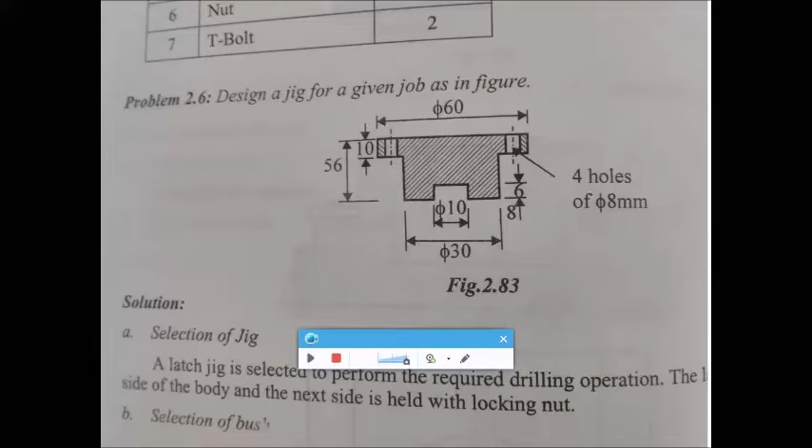So design a jig for a given job as shown in the figure. We will make a note of these dimensions. It has a length of 60 mm, and we are going to make 4 holes of 8 mm dia. So we need 4 drill bushes.

As usual, we'll start with a rough sketch. We can go for a latch jig. We'll go for a simple rough sketch in order to get an idea of what are all the elements of the jig body, and what we'll be using to design a jig in order to make 4 holes on this component. So this is the rough sketch. Go for a rough sketch, you'll be getting an idea.

So you'll be using jig buttons. You may also require a jig feet, and we know about a latch jig. So when you unlock this part, it is going to open and we will be able to remove the component. So these are the 3 jig buttons which are used, and you can see the drill bushes. This is you can call this as a front view. On the isometric view, and on the top view, we will be able to see 4 holes. So top view is not given here.

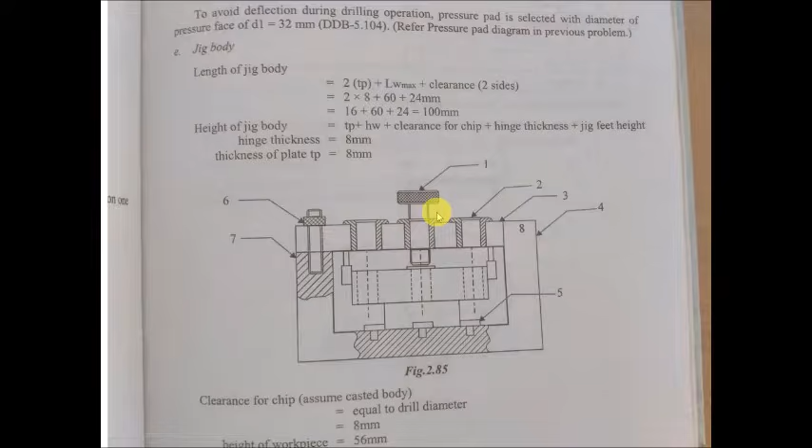I think this is enough, so we'll start with a rough bill of material. We need a clamping screw, 4 drill bushes, and then the jig body, jig button, and you have pin B and pin A. These are the locating pins, and you have a locking screw.

So after drawing the rough sketch and after designing each and every component, you have to draw a neat sketch of the entire workpiece along with the jig body plus its various components, and you also have to tabulate the bill of materials.

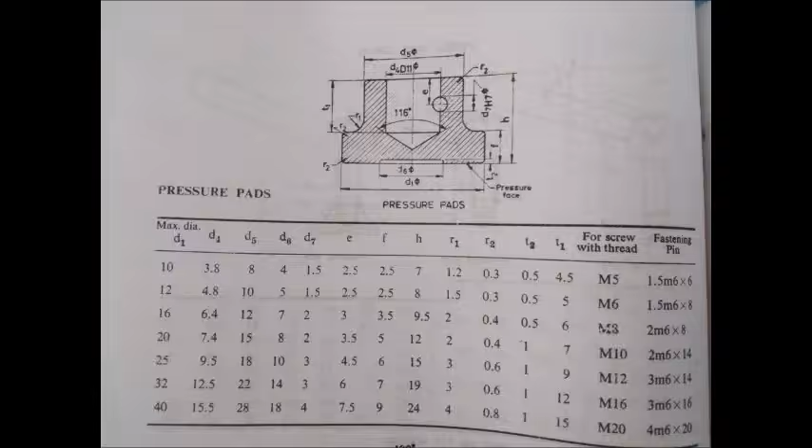you'll be selecting L1. What is L1? What is the value of L2 and D2? I think this can be easily selected from the next slide. For an 8 mm, this is 12. L2 is 8, and you can also go for this. D2 is 16 mm and D3 is 20 mm.

Corresponding tolerances can also be selected from the 3.9 for D1 F7. I think we already saw this in the previous examples. For D1 F7 and for a dia of 8 mm, this is the tolerance we can give. So multiply this by 0.001, so you will get 0.028 plus 0.013.

I think you can just draw a diagram of this drill bush. This is what is L1, what is L2, D3, D1 and D2. And D1 F7 from design data book page 3.9, and D2 H6 from the design data book page number 3.7. So these are all the tolerances for D1 and D2.

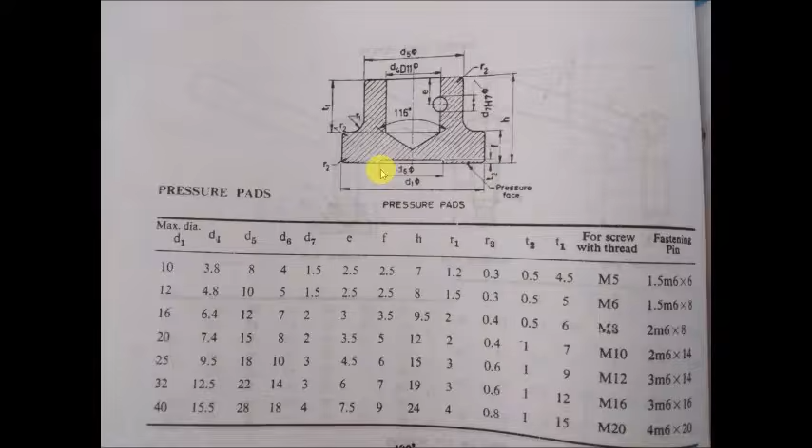So this is D1, this for the D2 H6. D2 H6 is a negative value. Always go for negative tolerance for the push fit, that is for D2, and positive tolerance for the running fit D1. So this is minus 0, this will be minus 0.011. This we found out from D2 H6

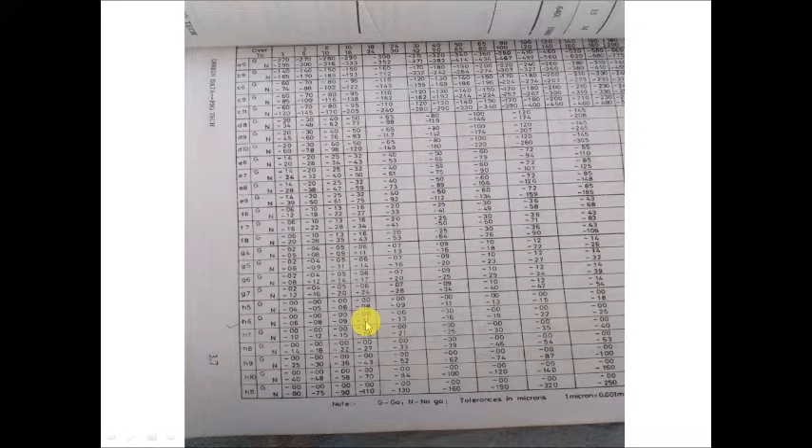for the value of D2. So D2 is 16 mm. For 16 mm D2 H6 we will be able to find out, so minus 0.011. That is here D2H6 for D2 value. So this is the value, that is 0.00, 0.011. So this is a negative tolerance.

Then you can go for the selection of the type of locator, so we'll be using a jig button. For this we'll go to page number 5.98. So this jig button is what is going to, you can say, carry the component. Here in this area we will be using 3 jig buttons.

So this will be attached to the bottom portion of the jig body. We will be using these jig buttons, around 3 will be using. So this jig button locates the workpiece. So what about this center part? So this center part,

we'll go to the component. So this is the component. So the workpiece is going to rest on the top portion of the jig button. So here and here and also here, these 3 jig buttons.

Now we'll go to the page for jig button on the design data book. Yeah, this is the design data. I think for this...

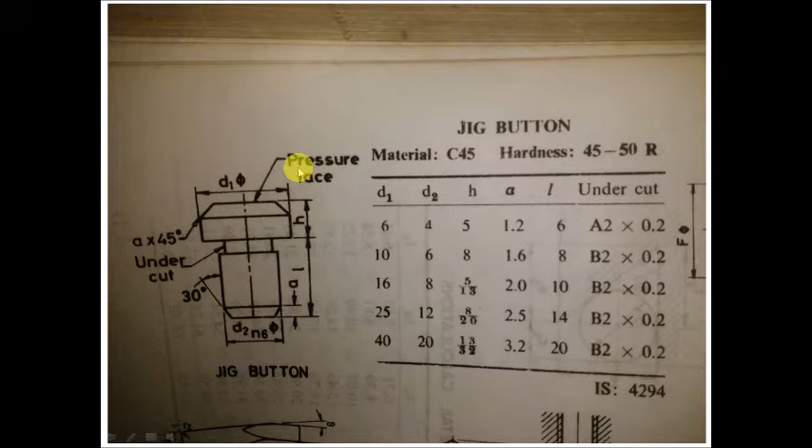We'll choose a diameter of D1 as 10 mm. So corresponding D2 value, with D1 as 10 mm, the corresponding D2 will be 6. You can also note down all these values with a simple sketch. So this is the pressure face, and here only, so this is D1.

So the component, this portion is going to go at the bottom, or it is going to be attached to the bottom portion of the jig body. So this is the top portion, this is the bottom portion, this is D1. I can note down the values: D1, D2 and height H, that is height H is 8 mm. This height H is 8 mm.

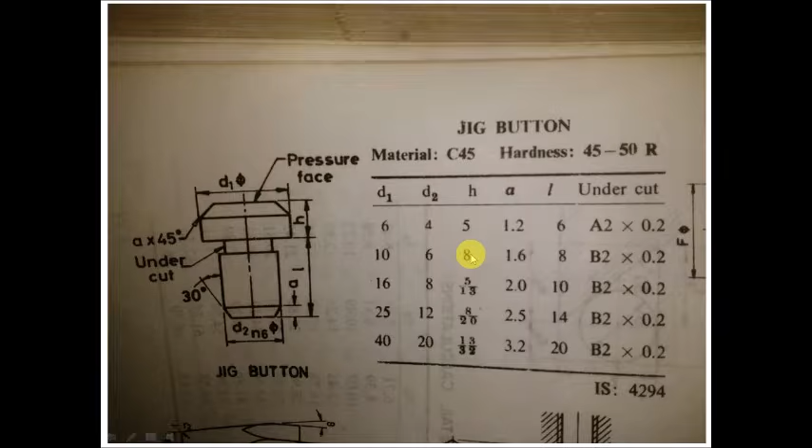Now we'll go to the selection of the clamping. To avoid deflection during the drilling operation, a pressure pad is selected. I think we have also seen this in a number of other examples. Go to 5.104. This is 5.104. So this pressure pad is going to rest on the top portion of the workpiece, in this area, pressure pad.

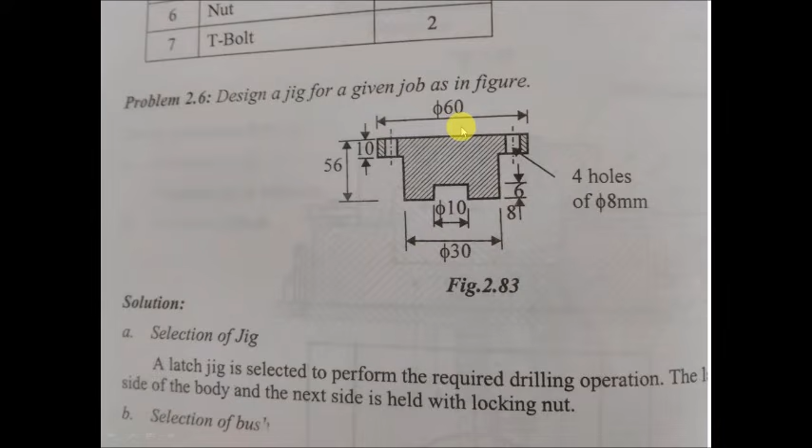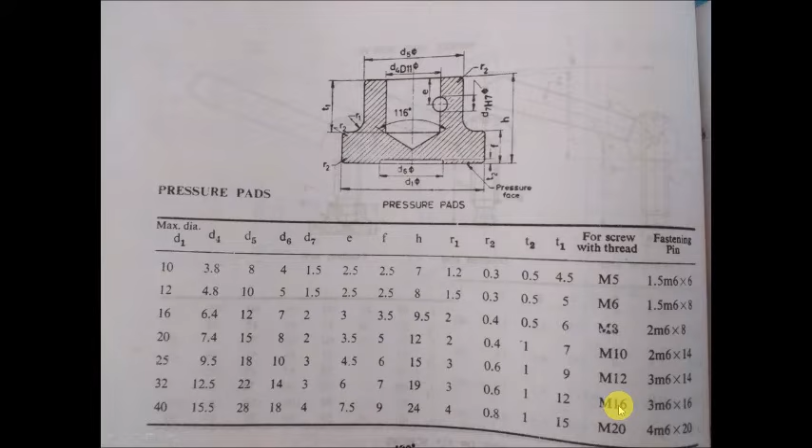So we are going to locate the workpiece. Jig buttons are used, and even the pressure pad. This is 60 mm. So we will choose a diameter of the pressure pad as 32. So corresponding values of D1, D4, D5, D6, D7 can be selected. You can draw a simple sketch of the pressure pad also, and the corresponding type of screw is M12 for this. Okay, now we will go towards the jig body.

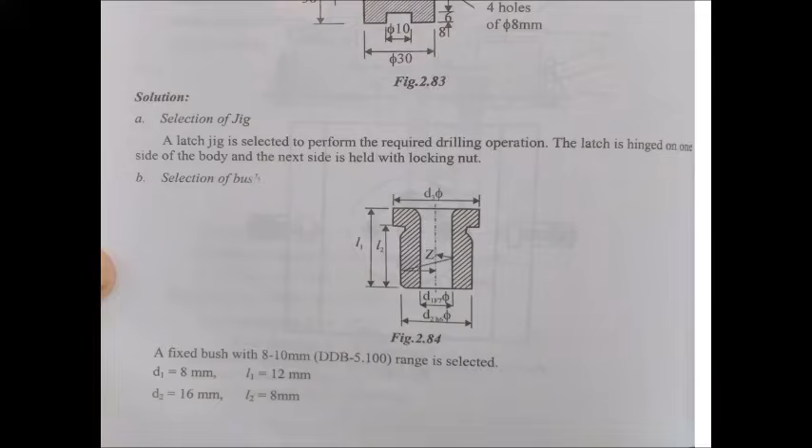Length of the jig body. What about the length of the jig body? So this is the length of the jig body. For this we need, of course, the thickness of the plate. We know the thickness of the plate will always be equal to L2 of the drill bush. I think we have also seen this many times in the previous examples. So this L2 is equal to the thickness of the jig plate.

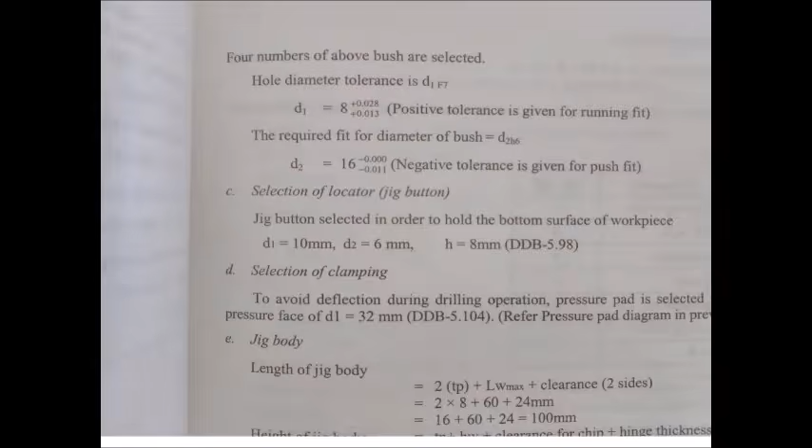So that is what is being shown here. The length of the jig body is equal to 2 times the thickness of the plate plus the length of the workpiece. We know the length of the workpiece is 60 mm, and also clearance is given as 24 mm, on both sides. So on both sides you can give a clearance of 24 mm put together, 12 plus 12 will be 24 mm. So this comprises the length of the jig body, which comes to approximately 100 mm.

Now, after the length, we need to find the height of the jig body. This area, this is the height of the jig body. So you're going to use a jig feet, and the jig feet's dimension will also be included.

So the height of the jig body will be: the thickness of the plate we know, height of the workpiece already given, even the clearance for chip, plus hinge thickness, plus the jig feet's height. We know the hinge thickness is 8 mm. The hinge thickness is 8 mm, and the thickness of the plate is also 8 mm. And we will be able to get these values. So this is the height of the jig body: 8 plus 56 plus 8 plus 8 plus 8.

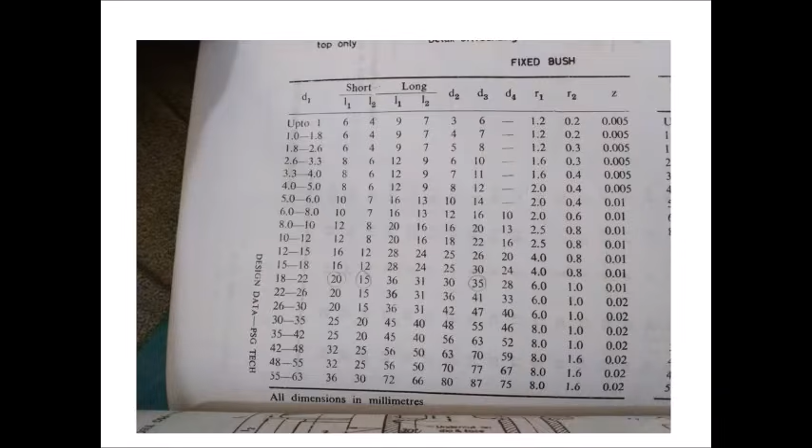In other words, we'll go back to the workpiece again. So this is 56 mm, so this height is also included, plus the height of the workpiece. We know the thickness of the plate, clearance for chip, plus the hinge thickness, plus the jig feet's height. The hinge thickness and the thickness of the jig plate will both be the same. So that is what is being shown here: it will be 8 plus 56 plus 8 plus 8 plus 8.

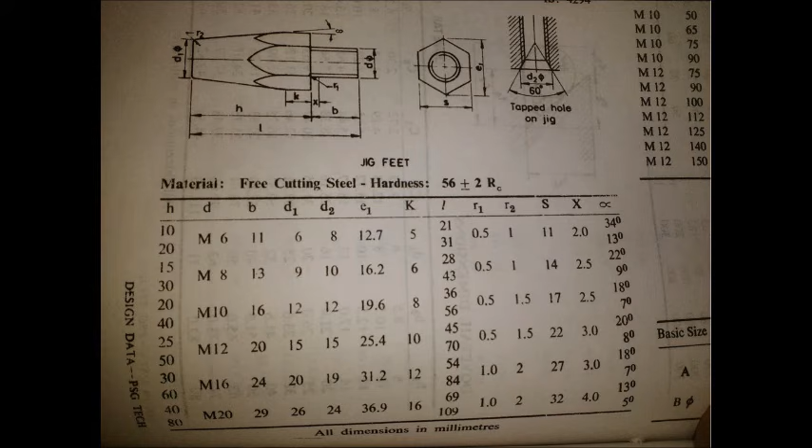The jig feet's height we also know, so the jig feet's height is 8 mm. It is not shown on the figure, it will be here in this area. So finally we found out what the height of the jig body is.

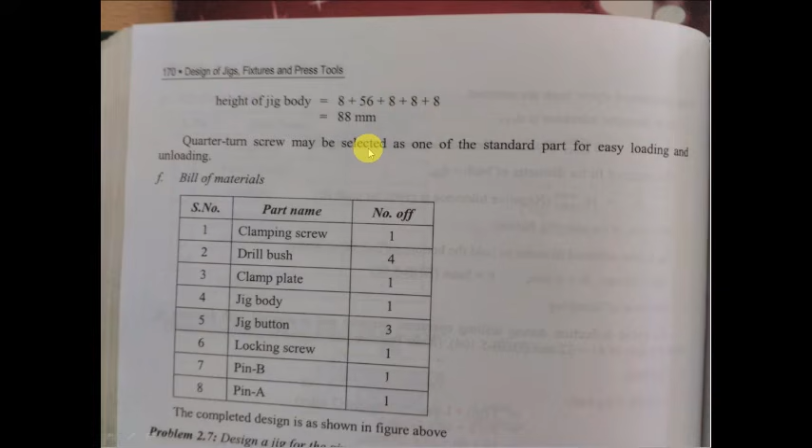So a quarter turn screw may be selected as one of the standard parts, for easy loading and unloading. This is the screw that is selected. You can open it and remove the workpiece. So this is the simple sketch of the bill of materials. Thus we have designed the latch jig for drilling 4 holes on this workpiece.